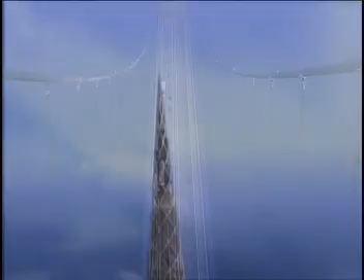Today's tallest skyscrapers are just over 1,400 feet high. Would it be impossible to build one twice as high? The largest bridges in the world today are around a mile long. Is it impossible to construct one 9 miles long, connecting Europe and Africa? The largest ships in the world today are supertankers and aircraft carriers. But a ship 5 times their size?

Impossible. Or is it? In fact, all of these projects are already on the drawing boards. If built, they would be engineering achievements of historic proportions. But they would also present unprecedented challenges. Could they really be built? Would they be safe? And could they withstand the worst that nature could throw at them?

Engineering the impossible.

Hong Kong, a city of 7 million and growing fast. It's bursting at the seams. By the year 2050, Hong Kong's population will almost double. Where will these people live?

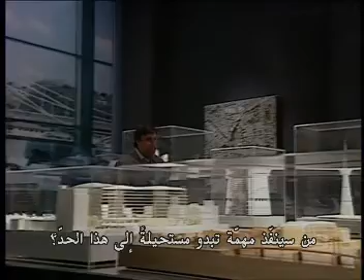One of Millennium's key designers is architect David Nelson. It would be a massive project, to say the least, and it would be a world project. To actually realize it, resources would have to come from the whole globe — Europe, America, Asia — all brought together. The challenge and the motivation for doing it would be to realize one of the world's largest and most complex construction projects.

If built, Millennium would be a staggering 2,755 feet tall, 170 stories. But a project of this scale would encounter enormous obstacles from the beginning.

The first problem Millennium's developers face is where to put it. By 2050, there probably won't be a square foot of buildable land left in Hong Kong. But the design team came up with a solution: they decided to put the tower out in the harbor.

Millennium's other chief designer is Andy Miller. If you took it and put it into the harbour or into the ocean, you're not using up any more land, and what you could possibly do is then open up land around the base of the building and start to create parks and do all of those kinds of things. If it could be done, Millennium would add to Hong Kong's limited land base instead of consume it.

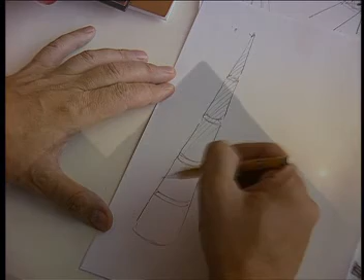Probably the earliest attempts at high-rise architecture were the Great Pyramids, built 5,000 years ago. At 500 feet tall, this one is impressive for the period. But by today's standards, the pyramids are somewhat impractical. 40,000 workers toiled for decades to place the 2.5 million stone blocks. And when completed, there was room for only one occupant. And he was dead.

Things didn't change much for centuries through the 1850s. Through all that time, the essential building materials were stone and brick, and those had major limitations. Stone buildings have to support themselves with their exterior walls. The taller a building, the thicker its walls had to be. So 5 stories was about the limit.

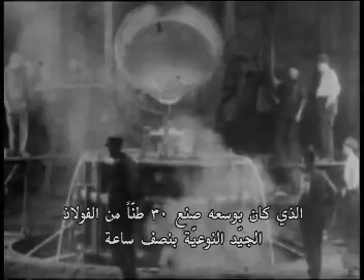Then, suddenly, everything changed. Somebody invented steel. His name was Henry Bessemer. In 1856, he perfected the Bessemer steel converter, which could make 30 tons of high-grade steel in half an hour. Steel was 10 times stronger than stone, and it was lighter. Now engineers could make a super strong, super light skeleton for a building. With steel, the sky was the limit.

Well, not quite. There was still one more problem to be solved: stairs. Even if you could build a 30-story building, who would ever climb all those stairs? Happily, in 1853, Elijah Otis invented the hydraulic safety elevator.

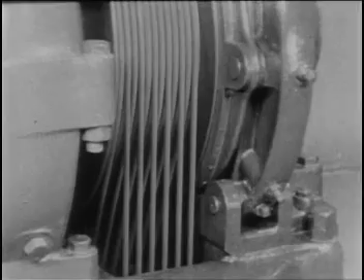Otis had a brilliant insight. He knew that industrial titans would covet those top floors as the perfect spots for gazing down like gods on the world they were taking over. His elevator was just the chariot to take them to those rarefied heights.

The race for the sky was on. The first steel skeleton skyscraper was Chicago's Home Insurance Building in 1885. New York's Flatiron Building was completed in 1902. At 22 stories, it was never the tallest, but its triangle shape still attracts sightseers. By the late 20s, the streets of Manhattan had sprouted nearly 200 buildings at least as high.

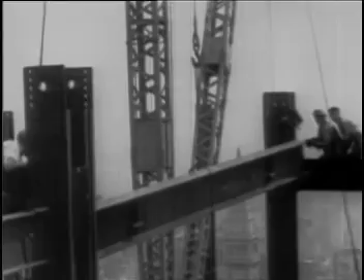The Chrysler Building was finished in 1930. It claimed the title of world's tallest, but only briefly. It was overtaken in 1931 by the Empire State Building. At a staggering 1,250 feet, it became a symbol of 20th century optimism, suggesting that if we put our hearts and minds to it, nothing was impossible.

For the rest of the century, city skylines grew to dizzying heights. And a new word was born: skyscraper. Of course, the battle for bragging rights never ends. Today's tallest building is Malaysia's Petronas Towers in Kuala Lumpur. Finished in 1997, the slender towers are shaped as 8-pointed stars, and they stand 1,483 feet high, if you include the spires.

Why the continuing push for greater height? Perhaps it's the simple human drive to rise to the challenge. There's a natural desire to push forward, building higher, longer, doing things that stretch the imagination. Seems to be something that's been with man for all time.

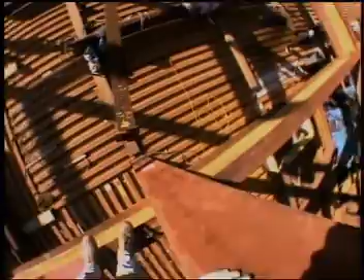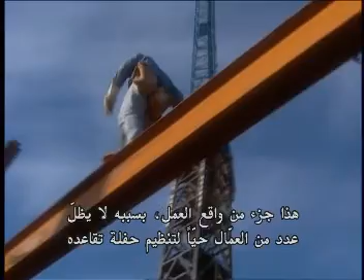Ironworkers wrestle 5-ton girders into position while dangling thousands of feet up in the air. The only way to get around up here is to walk on those same narrow beams. It's a reality of the business that not everybody makes it to the retirement party. At all times, you could be killed, or hurt, maimed.

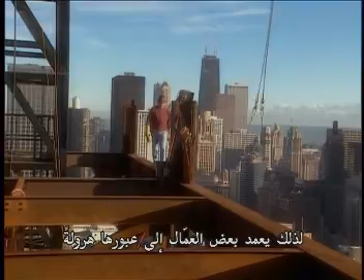Because it's so dangerous, these workers are supposed to follow strict rules. For instance, the safe way to get around on the beams is to straddle them. But it's an awkward thing to do. So sometimes the workers will just scamper across. It saves time and an aching back. But one slip, and it's an express ride to the ground floor.

Ironworkers literally stitch the building together, one piece at a time, from the bottom up. To join two beams together, they'll climb up a 12-foot column 100 stories in the air. It's often done without a safety harness because at the top, there's nothing to hook onto. They call this maneuver hanging iron.

Most people think that all the hard hats do is follow the plans. But frequently, these workers need to make critical decisions. Their experience and skill can keep a project from falling behind schedule. We fix the engineer's mistakes. That's why we're called ironworkers. We work the iron to make it fit.

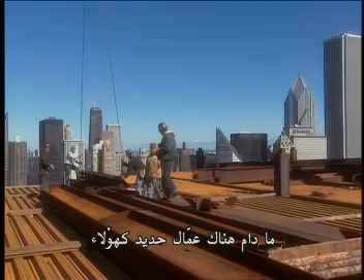As long as there are ironworkers like these, who take pride in their work, engineers and architects will continue to build their dreams. Well, I can look at the skyline and know I took a small part, and I'm proud of that. I really am.

These workers would jump at the chance to work on something as meaty as Millennium Tower. It's nice, I think it's beautiful. It's sharp, it's state of the art. And Millennium will need them, thousands of them.

But such a complex project would also require entirely new construction techniques. In fact, building engineers have already begun to automate the construction process.

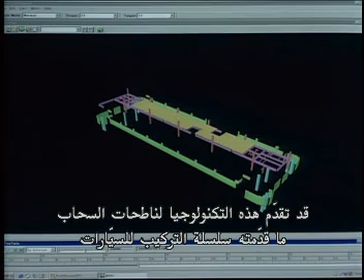One of the most ingenious systems now in use is called the self-rising factory. Designed by Obayashi of Japan, one of the world's largest engineering firms, this technology might do for skyscrapers what the assembly line did for cars.

A weatherproof enclosure is built around a suite of robotic cranes and lifts. The building's structural steel segments are delivered to the site according to a precise schedule. Every piece is labeled with its final position in the building.

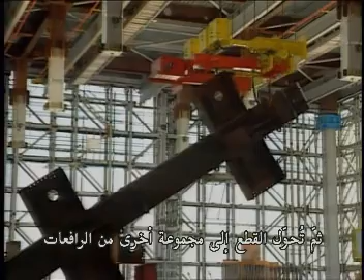Guided by a master computer program, a set of cranes lifts each piece to the proper level. Then, the pieces are transferred to a second set of cranes, which moves them to their final location. With the beams held in place, workers can easily bolt them together from the safety of a support platform.

When one level is completed, the entire self-rising factory does its self-rising thing, and the process starts again. When the building is finished, the enclosure is lowered onto the top and connected. It becomes the building's roof.

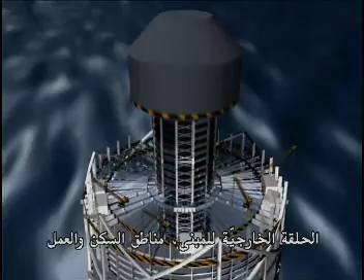For Millennium, the self-rising factory will sit on top of the tower's center core, which will house the elevator shafts and mechanical systems. The outer ring of the building, the living and working areas, will be built the old-fashioned way, by ironworkers performing their high-wire acts half a mile above Tokyo Bay.

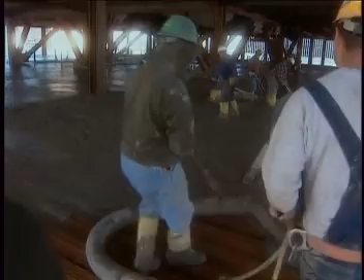But even with state-of-the-art construction techniques, Millennium Tower will still be an enormously complex project. It will require so much concrete, steel, and glass, it could single-handedly cause disruptions to the global supply.

Because of the scale of it, something like Millennium Tower would use the entire steel production of Japan for a whole year plus. And of course, that's not going to happen. They wouldn't be able to build any cars, they wouldn't be able to build any hi-fis or anything like that at all. So the flow of materials to the site would have to come from global sources. It couldn't literally come from any one region.

And since Millennium would be a truly global endeavor, the completion of the tower would be cause for a global celebration. For the tower's builders, it'll also be the moment of truth.

That's because Millennium's radical design might create unforeseen problems that would need to get fixed in a hurry. In fact, a number of recent buildings have reached completion only to reveal dangerous flaws in their design or construction.

Boston, 1973. The city's newest skyscraper, the John Hancock Tower, nears completion. But an embarrassing problem with the building has already become apparent. The windows are falling out.

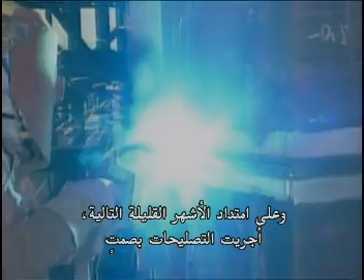The owners bring in an army of welders, and over the next few months, the repairs are made quietly. Disaster is averted.

The point is that modern buildings are so complex in their design and construction, even the best architects and engineers can't be sure they've thought of everything.

Millennium would be more complex than anything ever built. So its builders won't know for sure the building is safe until it's up. And they'll have little margin for error.

Massive tremors have brought down entire cities in this part of the world. Can Millennium's designers make it immune to these upheavals of the earth?

It's a complex problem because in all buildings, including Millennium, safety is just one concern among many. Millennium can't be a fortress. It will need to be a home, one that welcomes people in.

The plans call for 100,000 occupants and visitors, working or playing inside at any given moment. Getting those people into the building and making sure they have a great experience will be what makes Millennium successful. But how to do it?

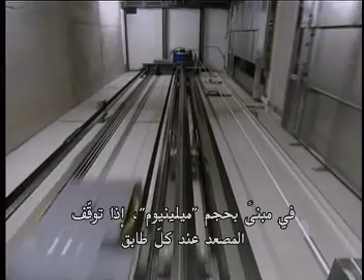The tricky part will be getting everyone where they need to go fast. What we're trying to do on this particular building is look for an alternative way of moving people vertically through the building, which is obviously the most important thing. You need to get people up efficiently and quickly. That's not as easy as it sounds. In a building millennium size, if each elevator stopped at every floor, the elevator shafts would take up 80% of the building.

So in Millennium, express elevators will take people from the ground floor to one of the sky centers every 30 floors up. From there, passengers can change to local cars for the floors in between. Companies like Mitsubishi, Otis, and Schindler are already working on the elevators of the future. They've developed high-tech systems with extra thick cables and triple-decker cars that can hold up to 160 passengers. Electromagnetic designs may eliminate cables altogether and even allow elevators to travel horizontally.

The key, of course, is speed. And that's a problem, because elevators can already go a lot faster than people can stand.

This is NASA's Vomit Comet. It's a specially adapted passenger jet that lets prospective astronauts experience the effects of weightlessness. The plane climbs to over 30,000 feet and then goes into a controlled free fall, simulating the effect of zero gravity for its passengers.

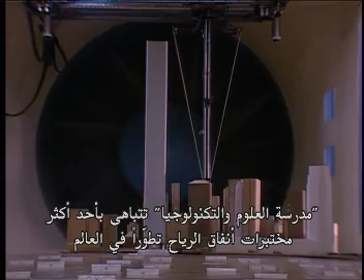So what's the best solution? Here at Hong Kong University, the School of Science and Technology boasts one of the world's most advanced wind tunnel laboratories. Now the three-quarter speed.

A leading expert on the effects of wind on architectural structures is Dr. Kenny Kwok. If you build a rather conventional square cross-section tower of similar height to the Millennium Tower, I would expect it to exhibit very, very large response, particularly in the crosswind directions.

A rectangular building produces wind vortices over its entire height. Those vortices are whirlpools of air that build up on all sides of the building, pushing and pulling it violently. Oh, you better pull it back, man. 212 again.

Nelson next considered a cylinder, a structure that's uniformly round from top to bottom. Wind flows more easily around a cylinder, but its constant diameter from the ground up still creates problems. And if the shape is constant from top to bottom, that vortex accumulates together, and that puts massive force into the building, which has to be resisted.

A cone shape eliminates that problem by varying its diameter along the full length of the building. For the Millennium Tower, it changes shape continuously so that the vortex shedding pattern is not a regular vortex shedding pattern over the entire height of the structure, but it changes according to the diameter of the building, which changes.

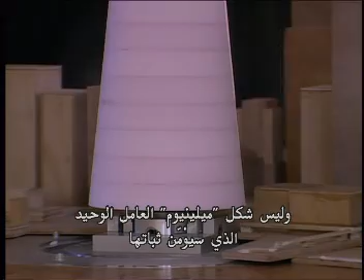Millennium's shape isn't the only thing that will provide its stability. It will also use a surprisingly simple device that's already stabilizing skyscrapers around the world. It's called a tuned mass damper.

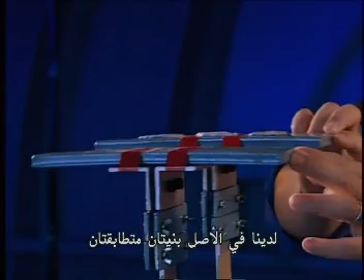What we have here is a simulation looking at the effect of different dampers and how they control building vibration. Initially we have two identical structures. You can see that it will take a little while for the oscillation to die down. If I stop there and introduce the twin liquid column damper, the shape of the container and the liquid column are designed so the liquid will oscillate within the column at the same frequency as the structure itself. Therefore, if I give it a deflection, you can see the one with the damper will stop vibrating a lot sooner than the one without it.

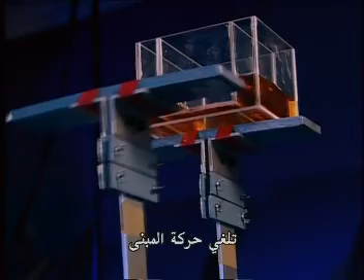Dampers, by creating vibration in the opposite direction of the sway, tend to cancel out the building's movement. And they're not just useful in the wind - they're also crucial in stabilizing the building during an earthquake.

We have two identical buildings here under simulated ground excitation, and you can see that without any additional damping, both buildings undergo vigorous vibration. What I'll introduce here is a sloshing damper on one of the buildings, and I subject the two buildings to the same excitation as before. You can see the building with the twin sloshing damper undergoes much smaller vibration compared with the building without it.

The shock waves created by an earthquake vibrate the ground at a frequency around 1 cycle per second. Buildings around 10 stories high resonate at that frequency, which is what causes the damage. Because a taller building has a lower resonant frequency, it shakes much less in an earthquake. Millennium's engineers are hoping that the tower is so tall it'll be impervious to a major earthquake.

In theory, Millennium will be one of the safest buildings ever built. In theory. But there's only one way that Millennium's designers will know for sure.

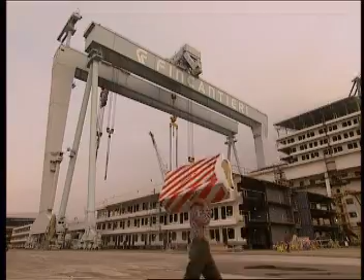The biggest ships in the world are built here in Italy. The Fincantieri company uses state-of-the-art technology to craft the world's most glamorous cruise ships. But the process is incredibly expensive. That's because so much of a ship has to be custom-made.

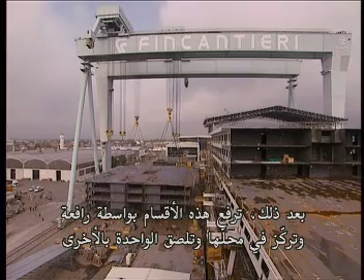Modern ships are shaped like long, thin wedges to help them slice through the water quickly. And the curved pieces of steel that make up that wedge can't be ordered from a catalog. They have to be made one at a time. Then, they're welded together by multi-million-dollar robotic machines into huge modular sections of the ship. Next, the sections are hoisted, dropped into place, and attached. The final assembly of the ship takes place on a dry dock. Once complete, the dry dock is flooded, and the ship is floated out to sea.

Modern shipbuilding methods have been perfected over the centuries, but they won't work for Norman Nixon and his Freedom Ship. They cost too much. We calculated what we would have to sell the square footage for, and we came up with a number of $1,200 per square foot. And at that level, it just wasn't economically feasible.

Freedom Ship would cost so much to build, hardly anyone could afford to live on it. Nixon needed to find a cheaper way, so he abandoned traditional shipbuilding and turned his attention to other large floating objects. The largest floating object in the world today isn't a ship at all. It's an airport.

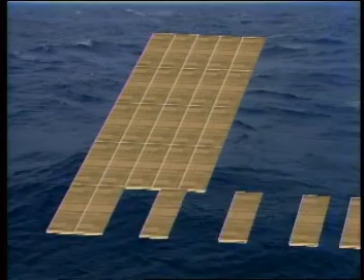Japan's experimental Megafloat airport is currently moored in Tokyo Bay. It's over half a mile long and over 200 feet wide. The concept behind Megafloat is surprisingly simple. It's a gigantic barge made up of hundreds of pressurized steel boxes. The boxes are welded together to form an enormous platform, which was pulled by tugboat into position and then anchored securely to the sea floor. Because Megafloat is constructed out of simple, off-the-shelf parts, it was cheap to build.

And that caught Norman Nixon's attention. We changed our philosophy entirely. Instead of following standard ship design philosophy in which you design every piece of steel in a particular manner for a particular location, we decided that we would go with standard off-the-shelf beams and so forth, because steel is actually very cheap.

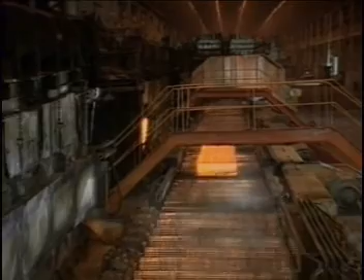Nixon wondered, could he build a ship like this from prefab parts? If he could, he'd eliminate the need for custom steel, and his construction costs would drop dramatically. For us, it works quite well. And instead of $1,200, we got it down to like $400 per square foot. So we realized we had something that was economically feasible.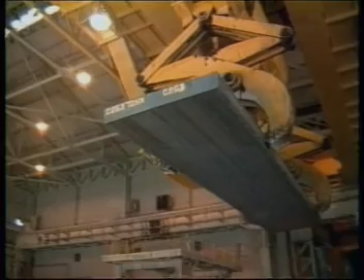Using cheaper off-the-shelf parts, Freedom Ship just might work. But there was a trade-off. All that steel would make Freedom Ship very heavy. And it would be so big, no dry dock in the world could hold it during construction. It would have to be assembled in the water. But where?

The location of choice turned out to be the Central American nation of Honduras. There's a tremendous bay called the Bay of Trujillo, about 4 miles of protected water, with very little traffic, so it turns out to be an excellent location. It's not far from the U.S., where our engineering crew is located.

This will be our first set of railings that we put in here in the center to slide the comm modules in. We'll add additional railings here and here later on. So we build the base of the ship in sections about 300 by 400 feet long, and we slide these base sections into the water. We bolt them together until we have the base of the ship.

Freedom's enormous base will be assembled from over 600 steel cells, up to 60 feet wide, 120 feet long, and 8 stories tall.

The project would consume vast quantities of just about everything. The ship is going to weigh like 3 million tons, so we use tremendous quantities of steel. We're probably going to be purchasing steel from 4 or 5 different countries.

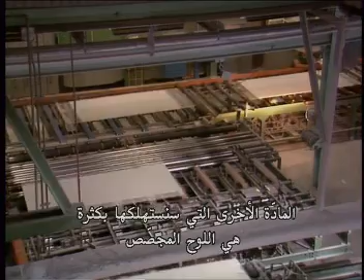Another one of the largest products we use is drywall. For a period of 2 years, we're going to be one of the world's largest purchasers of drywall. We've got several carpet mills producing carpet for us, and we'll be buying this from probably 25 or 30 different countries.

In fact, to ensure an uninterrupted flow of material during construction, Nixon may need to build his own factories. But there's one part of the ship that Nixon won't be able to get off the shelf.

Freedom's motors will be state-of-the-art. In fact, they'll more closely resemble jet engines than ship engines. They show just how far the art of seamanship has come since Noah's Ark.

For early seafaring civilizations like the Greeks and Romans, ships got around using wind power and manpower, and those sufficed for centuries. Then something happened that changed shipping forever: the steam engine.

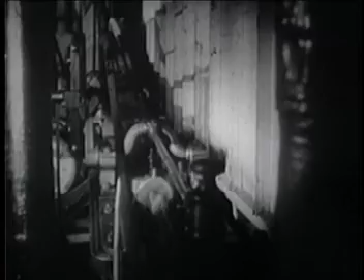In 1807, inventor Robert Fulton built the first successful steamboat. 12 years later, the first steam-powered transatlantic crossing took place, and travel by ship was never the same. The 20th century maritime behemoths, like the Queen Mary and the Queen Elizabeth, could cruise all day and night at a brisk 20 knots, powered by efficient steam turbine engines.

Nuclear power came on after World War II. It was too expensive for commercial ships, but large Navy ships adopted it, and it's still in use. Today, virtually all commercial ships use huge diesel engines with screw propellers. The technology is reliable, but it has drawbacks. The engines take up a lot of space in the belly of the ship, and the propellers are fixed in place, making the ship awkward to maneuver.

But Freedom Ship will change all that. It'll utilize a brand new propulsion system made up of hundreds of small electric motors, each mounted in its own pod. The pods reduce the need for a huge engine room inside the ship, and since they can swivel 360 degrees, the ship can move in any direction it needs to, even laterally.

Norman Nixon isn't worried about speed. In our case, speed is not really that important. We circle the world, but it takes us 2 years to make one revolution, so we're not in a hurry to go anyplace. Our particular philosophy would not work with someone who's building a cruise ship, and it would not work with someone building a cargo ship. But for us, it works quite well.

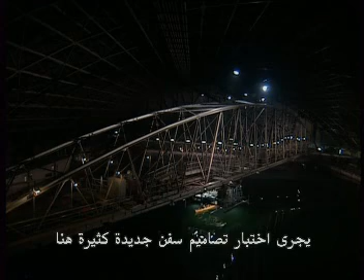Many new ship designs are tested here at the U.S. Navy Surface Warfare Center in Bethesda, Maryland. This wave tank, roughly the size of a professional football field, can put ships of every imaginable shape through precisely controlled, perfect storm conditions.

The thing you want to be able to do is test a model of a ship under conditions where you would never put a real ship. Because if you do it with a real ship and you're wrong, everybody's going to die.

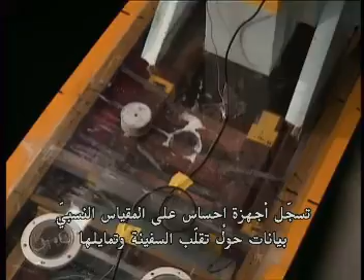These swells may not look like much, but this tank can produce waves up to hurricane force. Sensors on the scale model record data about the ship's roll and sway, as well as twisting and buckling of the hull.

From a suspended control booth, operators run hundreds of trials with different sized waves. The data will then be collected and analyzed.

We can look at the operability of a model. That means how well it can perform its mission out in the ocean. We can look at capsize risk. We can look at seasickness. We can look at lateral accelerations, which might mean somebody gets tossed overboard if the ship rolls too fast.

Tests like these provide crucial feedback to ship designers. The slightest alteration in weight or shape can mean the difference between a vessel that's seaworthy and one that could sink like a rock.

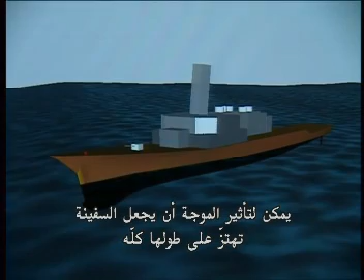Wave action can actually cause a ship to vibrate along its length. A ship must be able to withstand this vibration, or it could buckle and snap.

And where's our heading? Our heading's at 215? Yep. Go ahead and take your speed off. Slow her down to 10 knots. Throttling down.

Okay, let's try Freedom Ship then, Brad. Today, the facility will try to analyze Freedom Ship by using a computer model.

But the ship's dimensions are so large, the computer can't make sense of them. It's not going to work. Right now, we clearly are estimating way too much sideward movement of the ship, and that's just because it's shallower than what we're used to.

Even a world-class testing facility like this can't really test the Freedom Ship. It's a problem Norman Nixon will need to address. See, this is going to be a 3-story casino. That is the most valuable piece of property on the ship.

If he can't convince the skeptics, Freedom Ship will remain nothing more than a dream. Anytime you propose doing something that hasn't been done before, there's going to be people who say you can't do it. If everybody agreed with you, someone would have already done it.

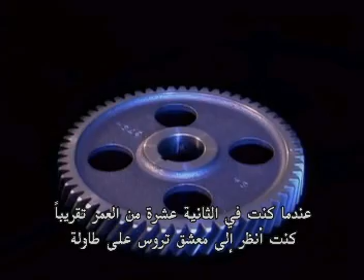Fresco's structures all derive from a simple form that fascinated him as a boy. When I was about 12 years old, I was looking at a gear on the table, and I saw the cities of the future. I think all inventions are based upon experiences like that. I don't think they come out of nowhere.

Fresco believes that civilization will be forced to colonize the sea if land becomes uninhabitable. The Earth can only support so many people comfortably, and if the population exceeds the capacity of the land, we're going to have to move seaward and build cities throughout the sea.

Working from his Florida studio, Fresco has spent decades making detailed drawings of his futuristic ocean cities. He also builds prototypes, experimenting continually with new materials. He even lives in one.

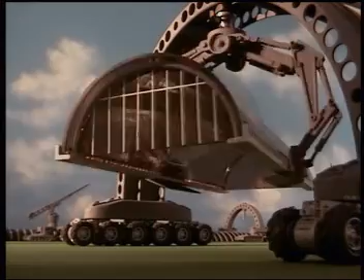Fresco's even developed plans for transporting his structures out to sea. They'll be constructed out of modular sections, assembled on land by robots, and then towed to their final ocean destinations.

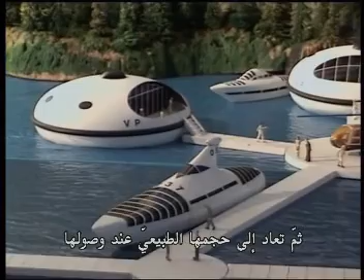Other structures will be made from high-tech materials called memory metal. These memory metals can be distorted, twisted, pulled out of shape, and then when a certain temperature is provided, that memory metal goes right back to its original shape. So buildings made from memory metals can be compressed into small cubes for towing and then snapped back to size upon arrival. And almost instantaneously, you will see a building erected before your eyes, and no humans working on it at all.

Fresco's vision goes beyond architecture. He sees his cities as tools for fostering humanistic values. I feel that environment shapes our values, the people we know, the people we identify with. What will drive people in the future? A world without war, without hatred, without bigotry, without prejudice. The future must extend an invitation for all people to join in because the problems affect everybody.

But the problems affecting Freedom Ship right now are more immediate. On the bridge, the captain pushes Freedom's 100 motors to the max. He needs to get to the safety of deep water, where the killer tsunami can't destroy his ship. But he still has less than 100 feet of water under him, and the wave is traveling straight toward him at 600 miles per hour.

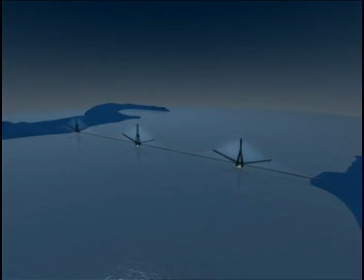And there was another problem. The water here is up to half a mile deep. That meant that the piers, the underwater pillars that support the bridge, would need to be twice the height of the world's tallest skyscrapers. And even if they could be built, they might create a massive safety problem. The supertankers that crisscross the straits are hard to steer, and if one of them collided with one of the piers, it could be a major disaster.

So a Gibraltar Bridge seemed an impossible dream, until one brilliant bridge builder took a closer look at the sea floor.

He noticed something that all the others had missed: an underwater plateau in the center of the straits. That meant the bridge's tallest pier, the center one, need only be 1,400 feet high, a buildable length. Suddenly, a bridge across the straits seemed possible.

The man who conceived this idea is one of the world's greatest bridge builders. T.Y. Lin came to the U.S. from China in his 20s with a vision. I think wild things, from a human point of view. And then I came to America. I had the technological know-how and knew how to put things together and make it happen.

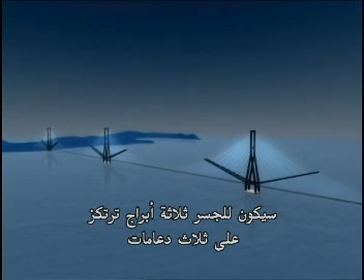Lin's design was ingenious. The bridge would have 3 towers sitting on 3 piers. The distance between the center tower and each outer tower would be just over 3 miles, with another 1.25 miles to each shore.

Engineer Mark Ketchum consulted on the bridge design. One of the most remarkable aspects of T.Y. Lin is that he's willing to think big. Scale has never scared him.

The scale of T.Y. Lin's design for the Gibraltar Bridge dwarfs any other bridge, indeed any other structure, ever built. The towers would soar 3,000 feet, twice as high as the tallest building in the world. It would take up to 10 years and cost up to $15 billion to build, making it the largest construction project ever.

Chuck Seim is the project engineer for the proposed Gibraltar Bridge. It'll use more concrete, more steel, more cables than any bridge ever built. It is the King Kong of bridges. If the Gibraltar Bridge were laid over New York City, it would start in downtown Brooklyn, sail over Manhattan, and wind up in New Jersey.

Building a bridge is far more difficult than other kinds of construction because it takes place on water. The first part of construction would be especially challenging: building the 3 underwater piers, each as tall and wide as a skyscraper.

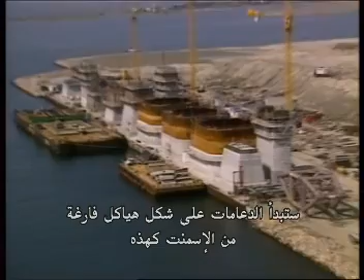The piers would begin as hollow concrete shells like these. They would be built on shore, then towed out to sea. The piers would be guided into place with the help of global positioning satellites, then filled with water and slowly sunk to the bottom.

This pier for a bridge in Denmark was successfully positioned within 8 inches of its target. But the pier is only 82 feet long. The center pier of the Gibraltar Bridge would be more than 18 times higher. Could it be accurately placed?

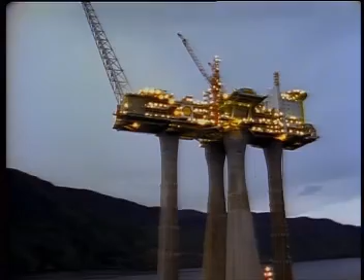The answer would come from offshore oil drilling platforms in the North Sea. They sit on top of piers that go down 1,100 feet, almost as far as the center Gibraltar Pier. The piers for oil drilling platforms, like those of bridges, are assembled onshore, then submerged.

But maneuvering a concrete pillar the size of a skyscraper in 1,000 feet of fast-moving water is extraordinarily dangerous. In 1991, an oil platform pier imploded as it was being positioned in the North Sea. It caused an underwater earthquake that registered 3.0 on the Richter scale. If a similar accident occurred in the busy Gibraltar Straits, it could be catastrophic.

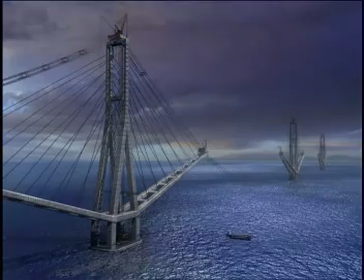Even if engineers did manage to construct the bridge's piers, they would then face the next enormous challenge: building the 3 towers, the cable system, and the road deck. The Gibraltar Bridge's sheer size and weight meant finding the right cable system was crucial.

The designers considered several classic solutions. This was one of them. San Francisco's Golden Gate is a suspension bridge. That means its road deck is suspended from 2 massive steel cables slung across 2 towers. The cables transfer the weight of the bridge to the towers. The bridge is more than a mile long. It too was considered impossible to build, but it's only a fraction of the proposed Gibraltar Bridge.

The main cables of a suspension bridge are a crucial element. The Storebælt Bridge in Denmark is one of the largest suspension bridges in the world. Soaring up to 846 feet, it's the tallest structure in Denmark and spans a full mile.

Near each end of the bridge, under the roadway, are massive structures known as anchor blocks. The blocks extend 40 feet below the surface. The blocks are where the cables are locked down and kept taut.

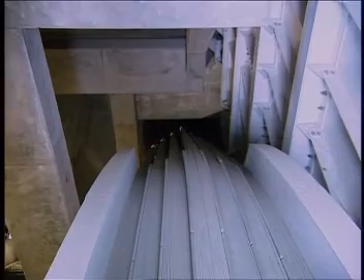Each main cable is actually a collection of 18,600 wires grouped into 37 strands. Each strand is looped around a red steel anchor bolt and forms a continuous loop from this anchorage to the anchorage on the other side of the bridge.

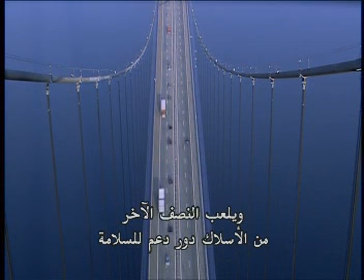Only a quarter of the wires actually support the bridge itself. Another quarter carry the weight of the traffic. The other half of the wires serve as a safety backup.

Each wire is less than a quarter-inch thick, but it's made from high-strength steel, so it can carry the weight of a 3.5-ton cargo truck.

The cables must be maintained in good condition to stay strong. Engineer Peter Sluska explains how this is done from inside an anchor block. The most important element we need to consider in keeping these cables in good condition is to prevent corrosion. As part of that, this whole chamber is dehumidified in order to keep the humidity level below a level that steel will corrode at.

Work began on the bridge's 2 main cables in July 1996.

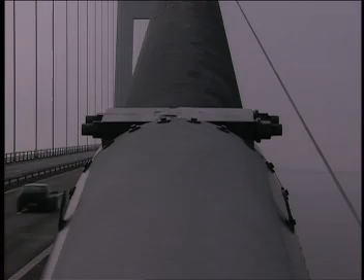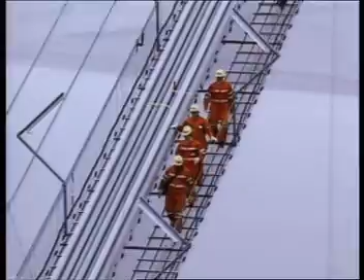It was done with a special apparatus called a spinning wheel, a kind of tramway that carried strands of wire across the bridge. This kind of work is a perilous high-wire act. A temporary catwalk had to be built between the two towers. Hundreds of feet above the water, workers spun loops of wire into a cable that weighed 9,500 tons when completed.

The spinning wheel carried 8 strands of wire at a time, from one anchor block up and over the two towers to the anchor block on the other side. The wires were laid side by side. They couldn't overlap or twist.

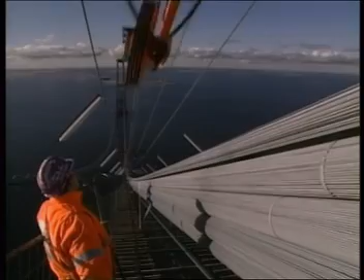When the spinning wheel had made more than 2,000 passes, the wires were squeezed together to form a cable, which was wrapped with steel wire, then coated with special paint. It took the workers more than 4 months of 18-hour days, 7 days a week, to spin the bridge's 2 main cables.

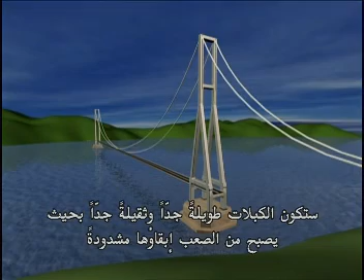They used enough wire to encircle the globe almost 3 times. But the cables for the Gibraltar Bridge would require 10 times as much wire. For Gibraltar's designers, that ruled out a pure suspension bridge. The cables would be so long and heavy, it might be hard to keep them taut. They might droop, the bridge might sag, and ultimately collapse.

So the designers of the Gibraltar Bridge had to look at another type of support system. It's called cable stay. In a cable-stayed bridge, the cables connect from the towers directly to the road deck itself, rather than to an anchor block as in a suspension bridge.

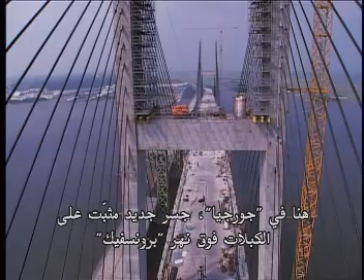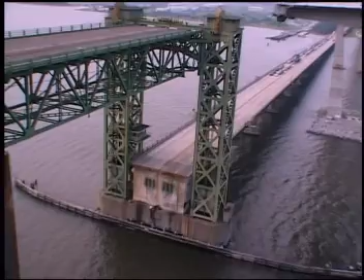Here in Georgia, a new cable-stayed bridge over the Brunswick River will soon be completed at a cost of $65 million. It's replacing an old bridge which is too low for ships to pass under. Traffic must come to a halt while the middle section is raised to let a ship through. With 20 ships passing under on an average day, that's a lot of waiting.

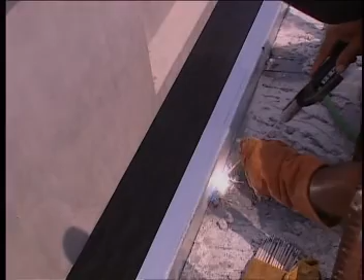The road deck of the new cable stay bridge will be over 200 feet above the water, so ships and cars can both move without interruption. In a cable stayed bridge, the road deck itself is part of what keeps the bridge up, so it must be constructed with great care.

To build the road deck, workers must first lay out a grid of steel reinforcement bars into which they will pour a special mixture of concrete. Construction of this road deck has been ongoing for more than a year. The workers have to pay special attention to the towers. If they build too far in one direction, the imbalance of weight could topple the tower.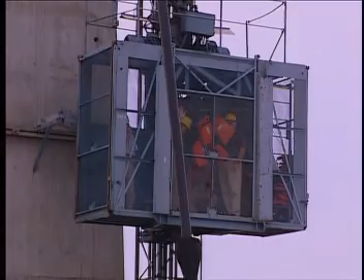Today, the bridge's designer and contractor are making an inspection. They'll get off 450 feet above the water. From here, they can get the best overview of the entire worksite.

So, actually, the shadow looks very interesting. Yeah, the current stay cable.

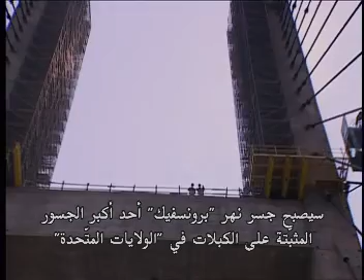When it's completed, the Brunswick River Bridge will be one of the largest cable stay bridges in the U.S. But it spans only a half mile of open water. The span of the Gibraltar Bridge would be 18 times longer, and its towers would be almost 7 times taller.

To the Brunswick River Bridge's chief designer, there's simply no comparison between the two bridges. I think if you put a Gibraltar right next to this bridge, you can hardly see this one anymore.

But the enormous length of the Gibraltar Bridge would make a purely cable-stayed design unworkable. The 9 miles of road deck over the straits would require so many cables, the support towers would need to be over 1 mile high. That's why the longest cable-stayed bridge ever built, the Tatara Bridge in Japan, spans only about a mile of open water. So the cable-stayed design wouldn't work for the Gibraltar Bridge either.

Some engineers suggested that the very idea of a Gibraltar Bridge was a mistake. They proposed an underwater tunnel similar to the 24-mile-long Eurotunnel between England and France.

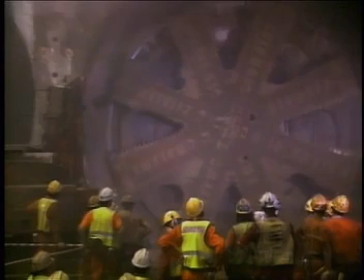The tunnel idea had a big advantage: maintenance. A bridge requires a whole lot of upkeep. The cables on Denmark's Storebælt Bridge must constantly be checked and repainted. Then there are those pesky light bulbs, all 9,192 of them, which must be changed by hand.

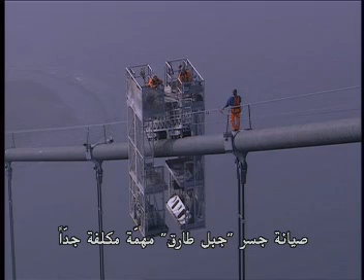Maintaining a Gibraltar Bridge would be enormously expensive, but a tunnel would have its own problems. The tunnel would be able to carry only electric trains. There'd be no way to vent automobile exhaust from a tunnel more than 9 miles long.

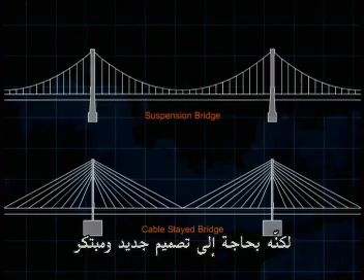So the bridge turned out to be the better choice after all. But it would need to have an innovative new design, one that combined the best elements of cable-stayed and suspension bridges.

Each tower would support a half-mile of road deck in a cable-stayed design, with the rest supported by suspension cables. This hybrid design includes another innovation: in the cable-stayed part of the bridge, the cables don't attach directly to the road deck, but to diagonal struts that soar out from the base of the towers.

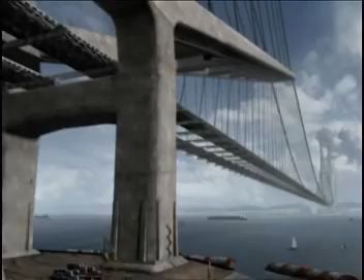But no bridge has ever been built with diagonal struts this big, and some engineers doubt it can be done. These diagonal struts have to be very heavy, and that would be a very inefficient and expensive element of that bridge. And this untested design would span one of the busiest and most dangerous waterways in the world.

The spectacular height of the bridge's towers would also raise the risks for the men and women who have to build them. Even working 200 feet above the calm Brunswick River can be very dangerous. If I concentrate on what I'm doing, then I can get the job done and not really think about falling.

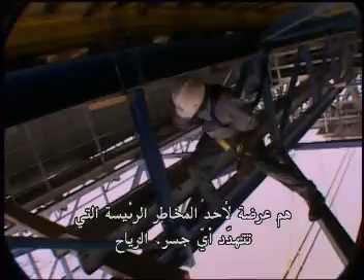The workers who would build the Gibraltar Bridge's 3,000-foot towers would be especially vulnerable to one of the main threats to any bridge: the wind. Engineer Brian West explains: on a day like this, we've got light winds, perhaps 10 to 15 miles an hour at roadway level. But you go up another 3,000 feet, you could be looking at winds in the 75 to 80 mile an hour range, and this will dramatically inhibit your ability to construct.

The Gibraltar Bridge would be pounded by gale force winds from the Atlantic Ocean and dust storms from the Sahara Desert.

To survive these winds, the Gibraltar Bridge, like all other bridges, is designed to move. This is a simulation of the actual movements of the bridge in a very high-speed windstorm, a 150-mile-an-hour wind. In order to make the movements visible, they've all been exaggerated by about 10 times. The bridge does exhibit some twisting and galloping over the suspended span, but the bridge stays stable in this very big windstorm.

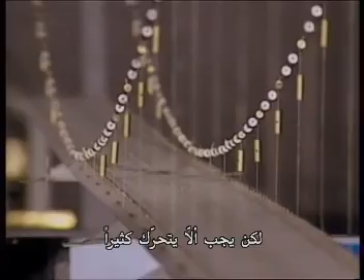A bridge must move in the wind to survive the wind, but it must not move too much. It's entirely possible to conceive of a structure that's strong enough to stand up, but moves around too much under traffic conditions, too much for people to be comfortable using it. That's what happened to the Millennium Bridge in London.

The first new crossing of the Thames in over 100 years opened to much fanfare in June 2000. People immediately noticed the bridge vibrating under them. The bridge actually started to sway as people shifted to keep their balance. It is actually wobbling, it seems to be swaying.

It was their own motion that threatened the state-of-the-art bridge. It magnified the bridge's initial vibrations into dramatic swaying, much like when everyone in a small boat stands up at once. Within days, the bridge had to be shut down.

The Army knows the perils of walking across even the simplest of bridges. When troops cross a bridge, they are ordered to break step and not march in unison, otherwise their rhythmic stepping could start a bridge swaying.

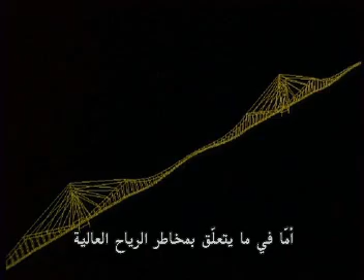When it comes to the dangers of high winds, every bridge designer has one famous catastrophe in mind: Puget Sound, Washington State, July 1st, 1940, opening day of the $6 million Tacoma Narrows Bridge. From the start, the bridge rollicked in the wind. Tourists would come to ride the wave of the bridge they called Galloping Gertie. Four months later, when the wind speed reached 42 miles per hour, the bridge reached its breaking point.

Alone on the bridge stood a reporter covering the sensation. He narrowly escaped.

But there's another risk besides the wind that would threaten the Gibraltar Bridge: its own weight. The bridge's towers would have to support almost 4 million tons, and then car traffic on top of that. Fortunately, there are emerging technologies which may help engineers lighten the load on the towers.

One new technology would build the 14-mile road deck from a surprising material: glass. This is fiberglass yarn, made from thousands of very fine filaments. It's woven into sheets of fabric on giant looms. The fabric is then attached to boards made of lightweight foam.

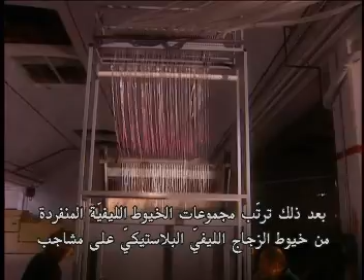Scores of individual strands of fiberglass yarn are arranged on racks and fed into a special sewing machine. The foam core and fabric are then sent through the sewing machine, which stitches hundreds of tiny crisscross structures into the foam core. They will give the panel its internal strength. Now it's ready for the final step.

A special resin is injected into the foam core under vacuum pressure. That resin is in fact a glue which is very flexible, and it gives it strength much stronger than the glass itself. They test the panel's strength on this machine.

We're at 10,000 load pounds. We're at 15,000 pounds. 20,000 pounds. 25,000 pounds, we're nearing failure. Failure at 27,300 pounds. That's it.

Fiberglass is going to be about five times stronger than concrete. Its ability to flex without cracking is much better than a concrete structure. A sudden crash on a concrete deck is going to crack the deck. It's going to collapse. It's very violent, very quick and rapid. In a fiberglass bridge deck, there are millions and millions of these fibers, and so they're breaking just one at a time and in bunches at a time. So the sudden impact only creates a local failure. It won't break the whole structure all at once.

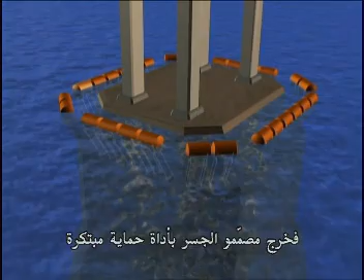So bridge designers came up with an innovative protection device: a ring of underwater bumpers. It's a brand new design that's never faced a real-life test. But in the Gibraltar Straits, that test could come very quickly.

You can never really predict when a navigation problem may develop—an engine failure, a loss of steerage—and these can happen, and a ship could possibly run into the tower. Also, in the situation with Gibraltar, you've got water depth surrounding the main towers that is very adequate to carry a ship right into the foundation. So it is a possibility.

The year is 2040. A Spanish family is driving home after a day spent strolling through the bazaars of Tangiers. What they don't know is that the hydraulic system on a giant supertanker two miles away has just failed, and it's carrying more than 2 million barrels of crude oil. The captain can no longer steer his ship, which has now become a 1 million-ton torpedo heading straight for the center pier.

Back in the car, the family's biggest concern is whether they'll make it home in time for dinner. But if the tanker crashes into the pier, they'll have much bigger worries. Will the bridge collapse? How many thousands of lives could be lost?

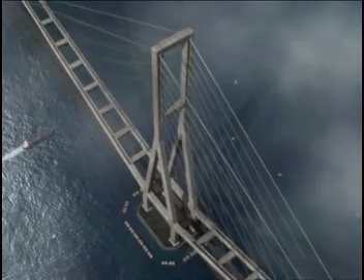Down in the engine room, the crew throws the engines into full reverse. But it's going to take four miles to bring a supertanker this size to a full stop. It all comes down to the bumper system. Can it take a hit from a force of 150,000 tons?

The bumper system works. And the Gibraltar Bridge, the bridge that was supposed to be impossible to build, stands tall.